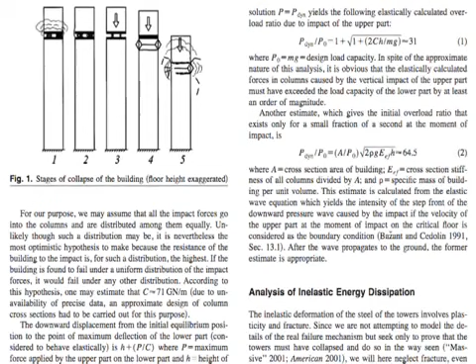Before and since 9/11, no steel-framed skyscrapers have ever completely collapsed from fire. On September 13th, just 48 hours after the event, Northwestern University structural engineer Zdenek Bazant published his simple analysis. Bazant imagined the upper block of the tower powering down through the entire undamaged lower part of the tower, in what became nicknamed the pile driver theory.

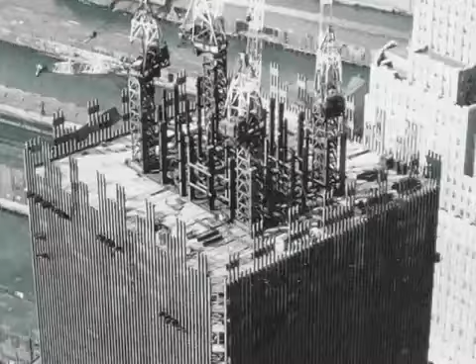That same day, September 13th, 2001, structural engineer Chris Wise also made it simple. He informed us that the fire reached 800 degrees Celsius, which melted the steel supports. The Twin Towers were among the largest and strongest structures ever built. They were a tube within a tube, with 240 steel box columns around the perimeter, and a central core structure of 47 massive and cross-braced steel columns.

Could plane crashes and fires really cause what we saw? It was the heat. The flames there burned too long and too hot, rising above 1,500 degrees. It began to melt the steel. The American people were in shock. Most accepted the simple explanations unquestioningly, but not everyone.

On September 11th, explosives expert Van Romero said he thought explosives were planted in the towers. Curiously, a week later, Romero flip-flopped and said that fire did it. But could fire really do this? It's hard to put it into words. To some people, it looked an awful lot like a mushroom cloud.

On October 21st, 2001, Jay McMichael posted, 'Muslims suspend the laws of physics.' I tried to be patriotic. I tried to believe, he says. McMichael points out that a jet fuel fire cannot possibly melt steel.

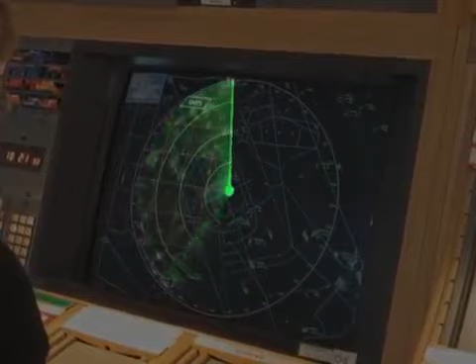Was it just a coincidence that a number of military war games were taking place on 9/11, including simulated hijackings, planes crashing into buildings, and fake blips injected into radar screens? NORAD and the FAA were confused.

Was it just a coincidence that a bioterror exercise called Tripod 2 was scheduled for the day after 9/11 on the pier right next to the World Trade Center, and that FEMA agents had already arrived the night before 9/11? 'To be honest with you, we arrived on late Monday night and went into action on Tuesday morning.'

Was it just a coincidence that on the day before 9/11, the Pentagon announced that it had misplaced $2.3 trillion. Was it just a coincidence that Flight 77 struck the Pentagon in an area that had recently had the outer walls renovated and that contained financial records, and not in the area where the top brass had their offices?

Flight 77 allegedly made a death-defying spiral dive maneuver, then flew in at ground level, knocking over multiple light poles, yet somehow pilot Hani Hanjour maintained control despite the fact that he couldn't even fly a Cessna, and managed to destroy the aircraft so completely that not a single serial number part was ever recovered.

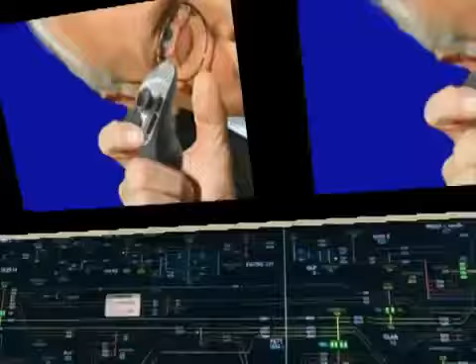That's the statement of a musician.

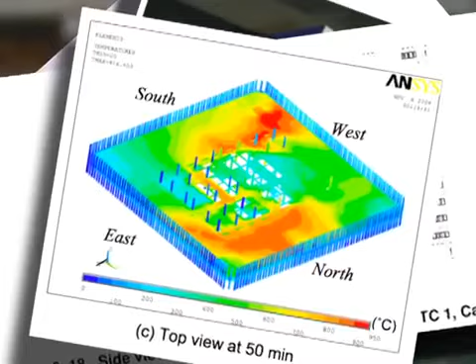In September 2005, the U.S. government's National Institute of Standards and Technology, or NIST, released their final study of the Twin Towers. The 10,000-page report contained very sophisticated computer models of the airplanes and the fires, but no effort was made to model or study the actual destruction. They dismissed it with three words.

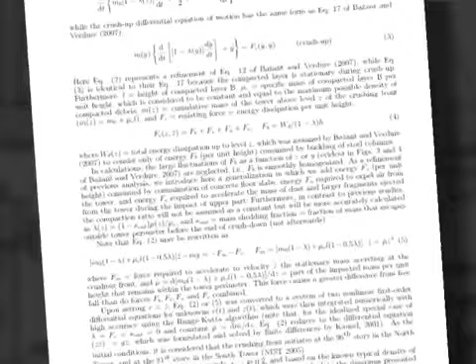We went to McMaster University and spoke with chemical and nuclear engineer Frank Greening. Greening has created a mathematical model attempting to show that a gravity-driven collapse was possible. They stop at that global collapse ensued, famous mantra. They just say global collapse ensued, and then they walk away. It's like, it started collapsing, we can go home now.

This takes over where NIST stops. Greening and co-author Bazant are continuing the original piledriver theory. Upper block drops one floor, 3.7 meters, hits the floor below, somehow manages to break the support structures of that floor. That floor now is therefore added to the block. It now hits the next floor, so on down. So the mass of the upper block actually grows, and it just chews away at the building. This is what Dr. Greening is imagining: a strong upper block pile driving down through the tower.

But this is not what we see. What we see is the top part of the building disintegrates before the undamaged lower part moves an inch. Here's a different view. Watch the corner. So much for Greening's piledriver.

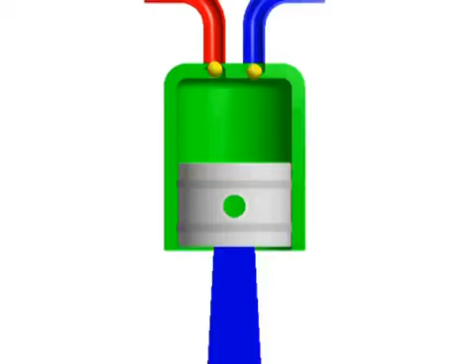As the towers were being destroyed, large ejections of debris were observed far below the main front. Loose Change claimed they were explosive charges going off. NIST and Popular Mechanics tried to explain it away with a piston analogy: when the top of that building comes down, all that air has to come out, and where it comes out is the windows. It blows out the windows. But for a piston to work compressing air, it has to be sealed.

I asked Dr. Greening how collapsing towers could be sealed. There were elevator shafts and stairwells. The air could be pushed down those. In a sense, the building itself is self-sealing, so some of it would be pushed out of that particular floor, out of the windows. This makes no sense.

We've already seen that the piston disintegrates before it pushes down on anything. But imagine for a moment that floors are intact and sealed and pushing air down. They cannot fall any faster than free fall. The main collapse front has only had enough time to get down to this level, yet we are to believe that material 20 stories below has already been crushed? How can that possibly be?

And there is another problem with the official collapse theory. Smoke from the fires was drifting up and off to the southeast because that's the way the breeze was blowing. As the buildings are destroyed, look what happens in this area. Here's what I want to call your attention to: just look in this area right here, what happens to the smoke and how much it expands.

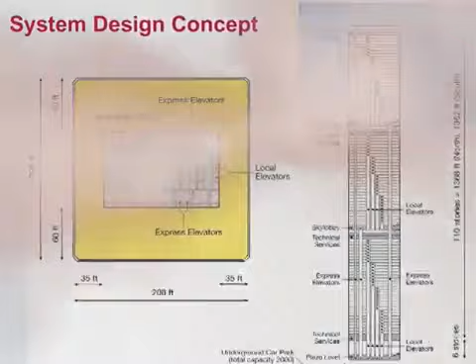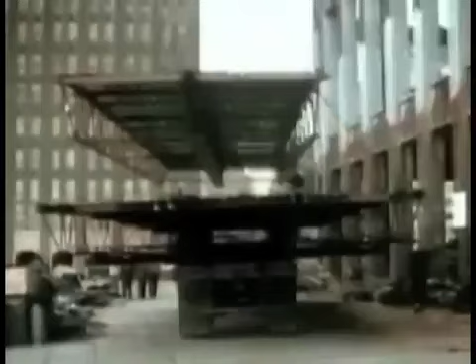And there is another problem with believing in a gravity collapse: the floors. Each tower had 110 floors. Corrugated steel pans, an acre in size, were held up by steel trusses, filled with steel-reinforced concrete. Everyone agrees that a gravity collapse does not have nearly enough energy to pulverize steel floor pans.

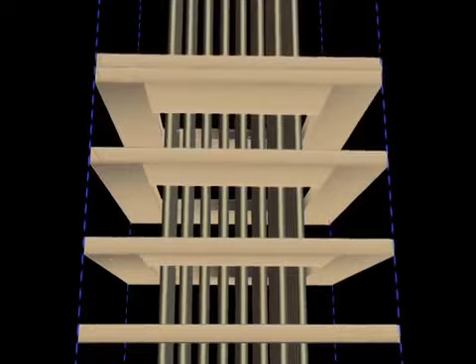The official story has to be that the floors all landed in the footprint of the building, because if too much of the mass goes outside the footprint, there's not enough left to push down, and any sort of collapse would just stop. Roughly, let's say 20% of mass shedding could be tolerated.

Most of the mass was somehow converted into very fine dust and spread all over lower Manhattan. Oops, I guess Mr. Blanchard didn't get the memo.

And there was yet another problem with the official story.